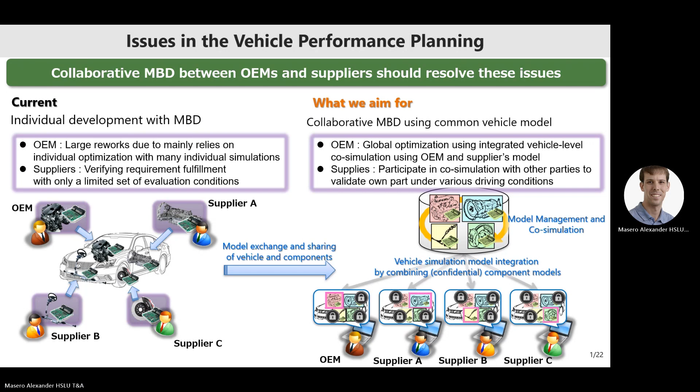In that point of view, these are some basic ideas for collaborative model-based development. In the very traditional way, we are just handing out and exchanging the model or requirements with each party.

But we can extend this with current IT technologies. One idea is to collect every model and data in one place, creating a database. We call it the Model Shelf in Japan, so that every party can register and use it.

The model and data, the second approach is an IT approach where we connect the systems across the network, connecting different simulation systems in each party with an idea to couple those.

Some extended idea is full digital integration, where every box is made in the same virtual space. But this is the solution.

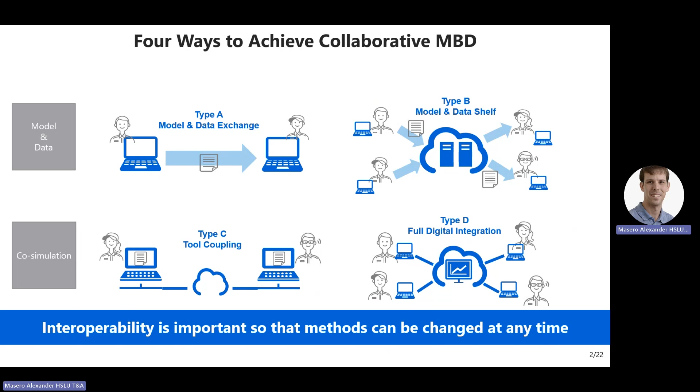But the important thing is that we need interoperability. It's important - you can select each type; for example, in the prototyping phase maybe this type is very good, but in a detailed design phase maybe some other type is better. But with any type, the model and data should be interoperable.

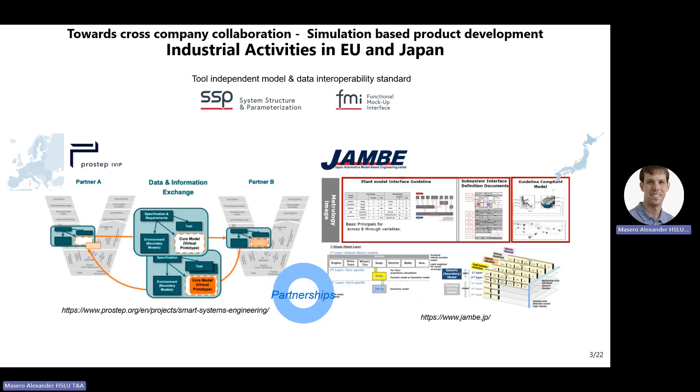prostep ivip and Japan's JAMBE are now collaborating and making studies together. This is, and also basically we are using the SSP and the FMI standard in this context.

Inside Japan, we have three groups promoting studies in the FMI and SSP standard. The first is JAMBE, the second is the FMI working group in JSA, and the third is a study group of virtual fields. These three groups are also making partnerships and collaborating in their studies.

This is a brief introduction about the JSA FMI study groups. We currently have 16 companies gathering in this group - Mazda, Honda, and Denso are also members, and some Japanese vendor offices also contribute design to these groups.

The main result of this study group is that we are publishing the FMI guidebook. The contents include Chapter 2, which covers FMI basics as a basic introduction, and we have also defined some guides - for example, which mode you need to select for independent use cases. Chapter 4 is a collection of FAQs, and we're also collecting an appendix. Unfortunately not every FMU can be described, but our working group members will edit each portion.

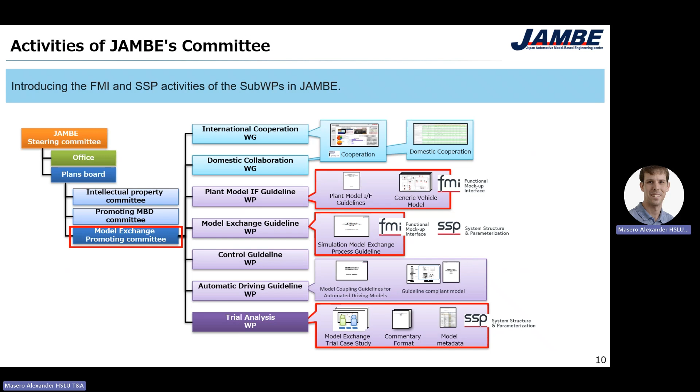The basic idea of the JAMBE is: first we create some common generic vehicle simulation model. The JAMBE is publishing several types of generic vehicle models.

Second is providing some guideline for plant modeling. The first simulation model is compliant with this guideline model. This is a showcase example of the guideline. The third is tightly collaborating with Smart Systems Engineering, where we also define the process guideline for model exchange.

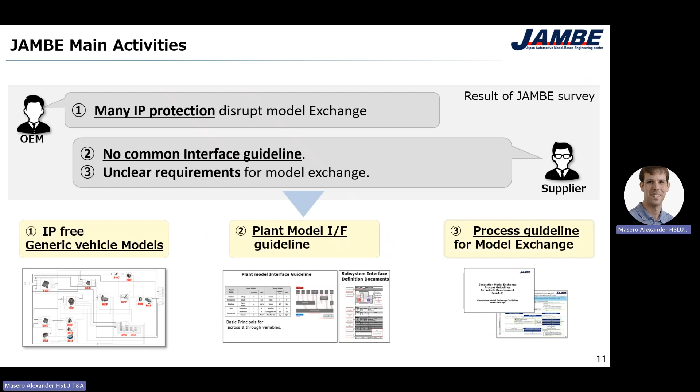About the generic vehicle model, we have a model interface guideline at first, so we create several types of guideline-compliant vehicle models. That means, for example, hybrid vehicle, electric vehicle, or conventional engine vehicle - these kinds of generic vehicle models we are developing. This model is basically created with support from the OEMs.

For example, the parallel hybrid vehicle is originally coming from the Toyota Prius, and Nissan is also contributing to developing the EV model. So many parameters are coming from component parameters supplied by the OEMs.

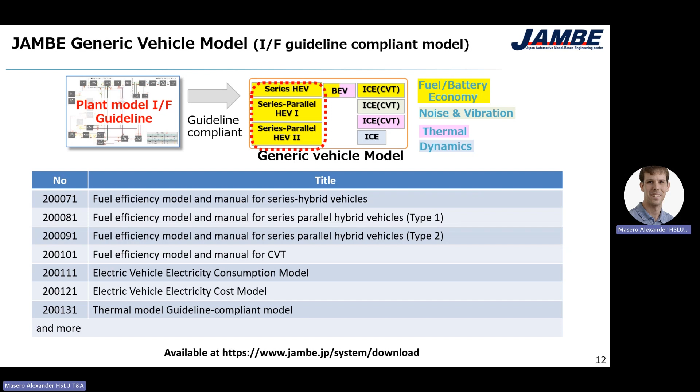For example, this is a parallel hybrid vehicle simulation construction. The point is that we are creating a set under an open license. This is open - I may describe the URL - but you can download it, everyone.

It's pretty nice. Basically every model is originally created using Simulink, and we are also providing a complete manual about the contents. The simulation model is divided into components such as ECU, engine, motor, battery, transmission, something like that. This is a collection of the basic key components of the vehicle.

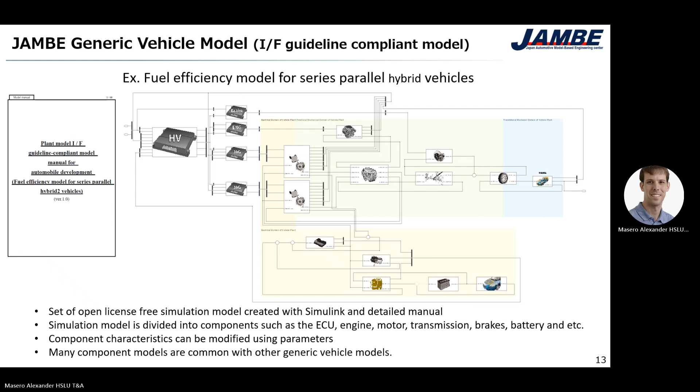This component level is common with the other generic models, and also the component characteristics can be modified using parameters. We are now experimenting with converting our generic simulation model into the FMI style.

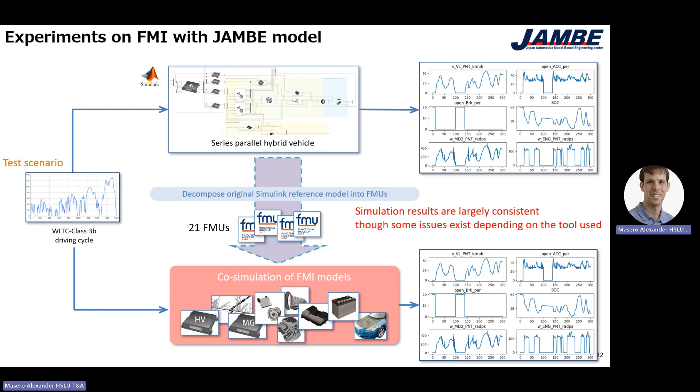This work is now continuing. For example, hybrid vehicle cases can be converted into the 21 FMUs, and we have verified the simulation results with both. Basically that work is done, but we found some issues depending on the tool, so I may report this kind of model to the FMI consortium.

For the SSP portion, we have an original manual, so we are trying to extract some metadata from the manual and convert it into SSP. That is the currently ongoing work.

At the moment, MIC-Core is defined in the common metadata set defined with process quantity, but we find some automotive-specific metadata extensions are needed. So that kind of flexibility is allowed in the SSP format.

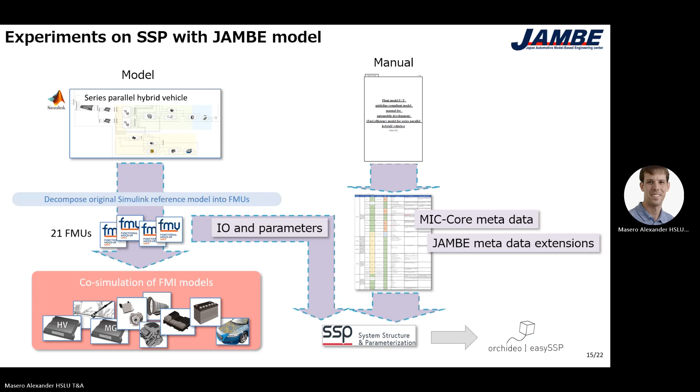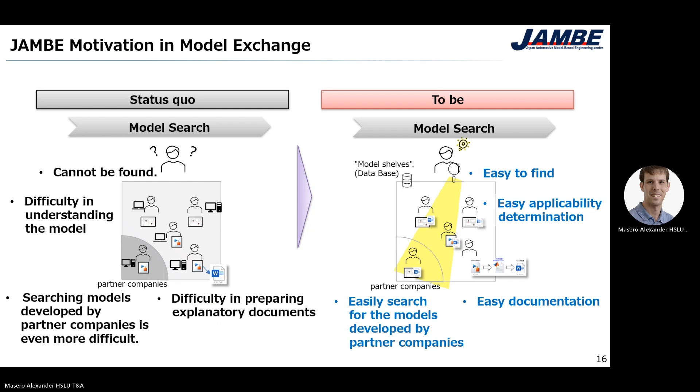The basic Japanese motivation for model exchange is reusability of the model. So how to fetch the model component from the model database is a main point of interest, and inside JAMBE we have some prototype.

This is an engineering system for model creation, searching and review. The basic idea is that model registration can be made by defining an Excel sheet for the design base specification, and also some model, FMI or Simulink model, can be implemented and attached to the document metadata with SSP format and stored in a database.

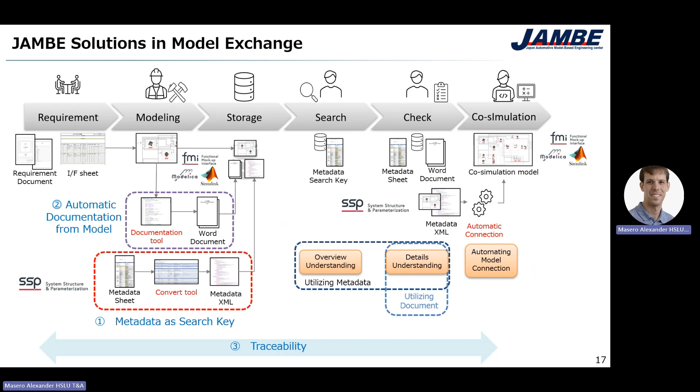On the user side, they can search for the necessary model components by utilizing the search key or the metadata attached in the SSP files, find the necessary model, evaluate it, connect it together and build the configuration. Those are some basic necessary features for an engineering system of model exchange.

At this conference we are continuing several additional workings on how to establish good model searching. In this case, the main topics are the method for the search key, and second, some portion can be automated, so we are jointly developing automatic conversion for the different topics.

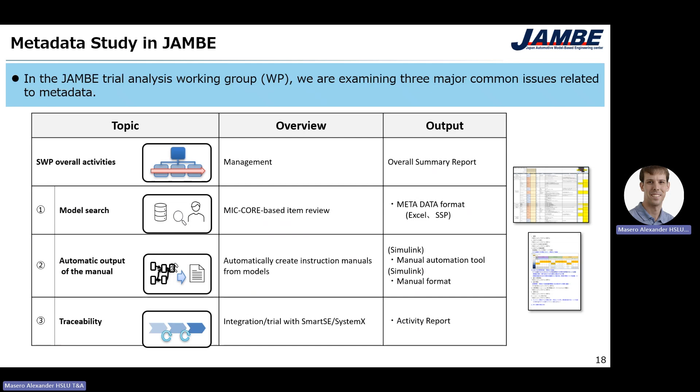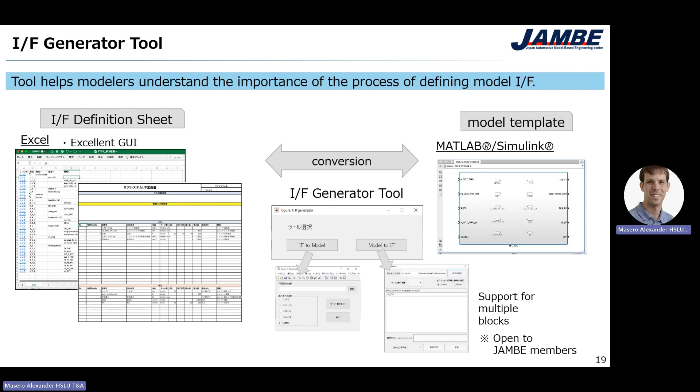This is some idea of the automatic conversion. We define an Excel sheet-style interface sheet, or design sheet, for the model. This specification can be converted into a template in MATLAB. Also, if you put comments into the MATLAB simulation model, that portion can be converted back into an Excel sheet or design sheet.

This year we are starting to create some use cases to demonstrate our ideas. We are currently organizing the summary of management for simulation topics, because we are creating a guideline or standard template for the summary simulation system module. We are now creating new demonstrations utilizing FMI and SSP to show the entire process.

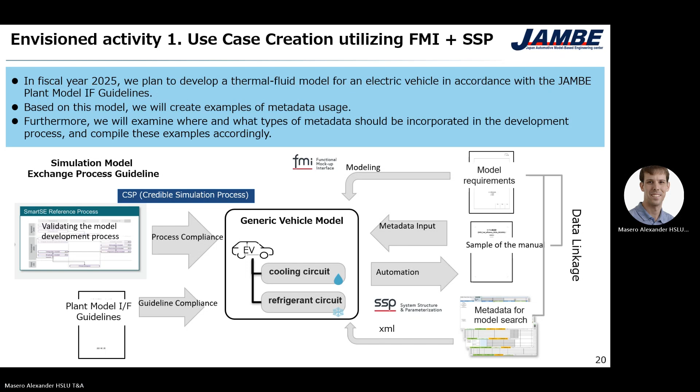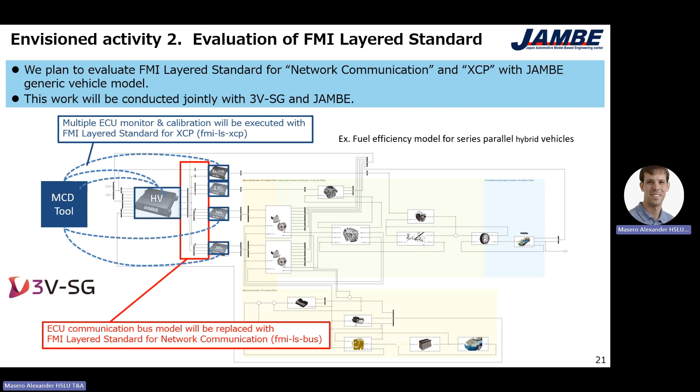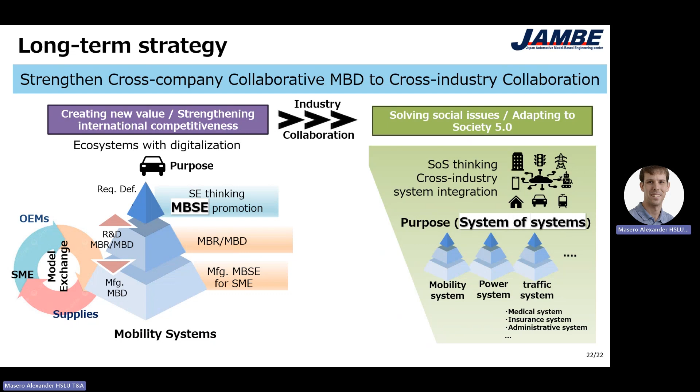Okay, thank you, this is the last one. This is a very long-term vision, but we are now studying automotive industry topics, as new software-defined vehicles are coming. We need this methodology or technology to extend to cross-industry collaboration. That is a very long-term goal of the activity.